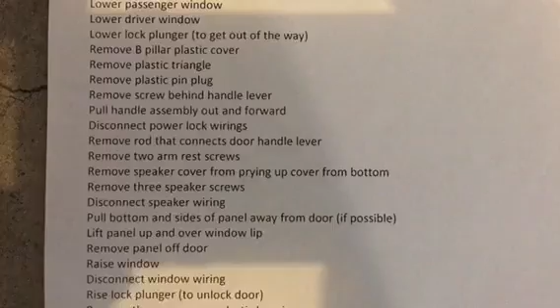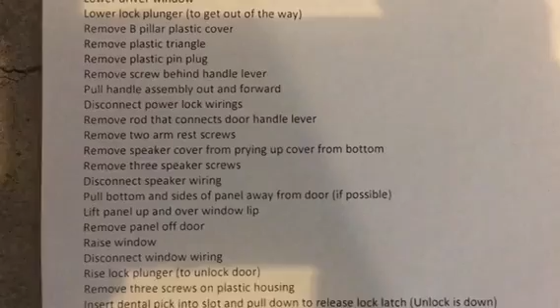From there you want to disconnect the power lock wiring, and then remove the rod that connects the door handle lever to that latch assembly we're talking about. Then you want to remove two screws for the armrest. Remove the speaker cover by prying that little plastic cover from the bottom.

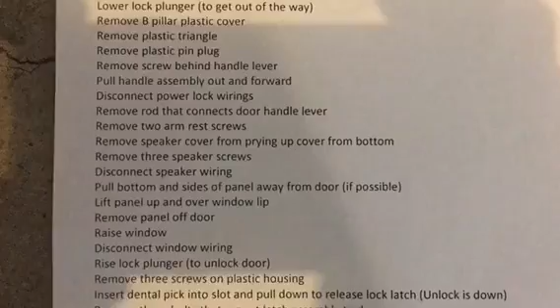I believe there's 3 or 4 screws that mount the speaker. It's dual purpose screws, I believe, that mount the speaker to the panel and then the panel to the door. Then you want to disconnect the speaker wiring. At that point, I believe the panel is ready to be removed.

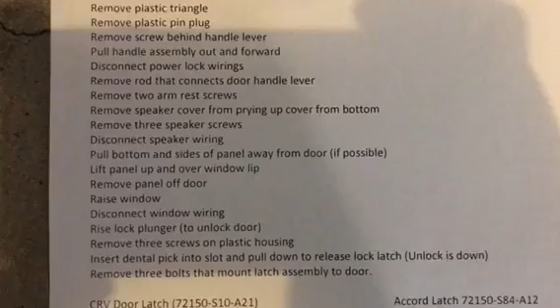Now the door is closed, so it's going to be difficult to do this. I don't even know if it's possible, but to actually now remove the panel. That is going to be, one, you want to, if you can, pop out the panel on the bottom. There are those very common plastic posts that snap in a door panel.

Once you have this free, then you remove the door panel by pulling it up and over the lip of the window. From there, now the door panel should be off, or as free as you can get it. Now from there, raise the window.

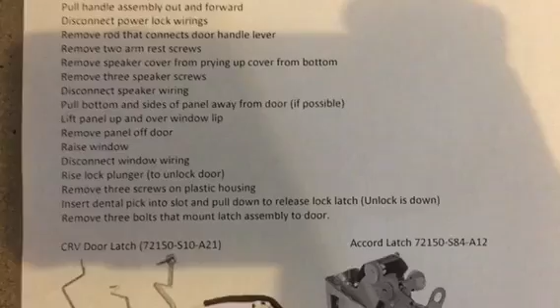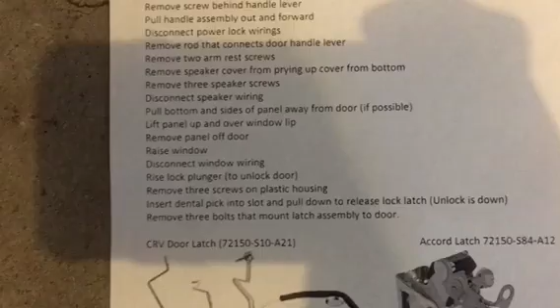Now we want the window out of the way. There are a couple of YouTube channels that say you can remove the guide, the slot that part of the window slides up and down in. Unfortunately, on the CRV, you cannot do that because the bolt is not on the inside of the door. It is on the side of the door, which you can't have access to.

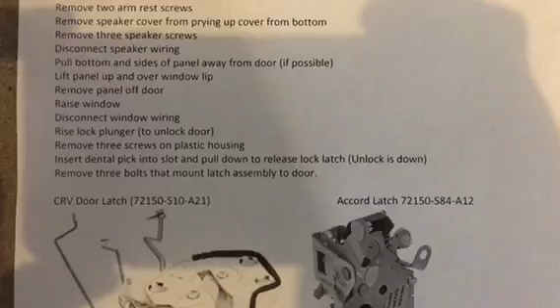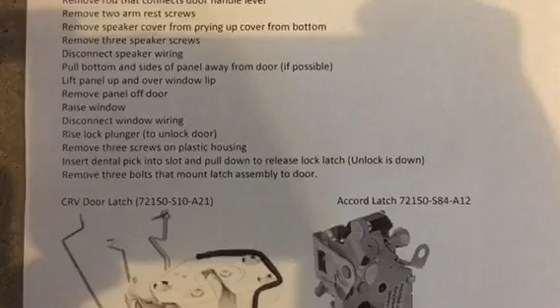Finally, now you want to raise the plunger. Basically, you want to unlock that assembly. From there, now you want to insert like a dental pick or something and pull this hidden pin down. That will, regardless of position, whether you're locked or the position of the handle, inside or outside, release that pin. This is going to be a little bit difficult to find because the YouTubes I've seen are for an Accord or a Honda Civic, not necessarily for the CRV.

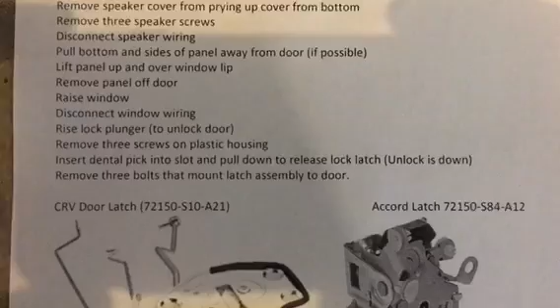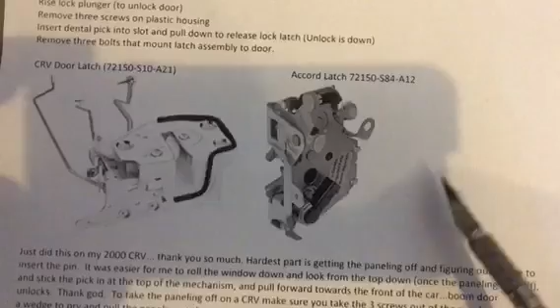Once you have that, there are going to be 3 bolts mounting the plastic cover on this. The YouTube videos I've seen are for something similar, but the CRV has something like this. These operate similarly, but the release of this latch pin is going to be different.

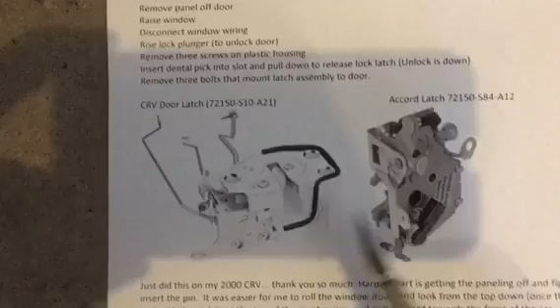These are the tools I have at my disposal - some tweezers, and I do have a dental pick around here, but these are the ones I'm going to be using. Let me show you what we're going to be doing on the inside in a moment.

So getting back, here's the inside of the door. Things we need to do - that's the plastic triangle, this should pop straight out. There's a screw back up under here. Once this is released and unscrewed, you can pop this forward, out and forward.

There will be an electrical connection for this power lock, as well as a rod assembly that you'll be able to take off. There's going to be a couple of screws right here. Sorry you can't see this too much, it's a cold winter day in Minnesota and I am in a garage with not much light.

Here's the speaker cover, can't even see it right now. Pop that off, there's 3 screws there. Then raise the lock, and if you can, pop the bottom part and the edges of the door panel off, and then you'll hopefully be able to slide the door panel up over the window ridge, and hopefully that'll do the trick.

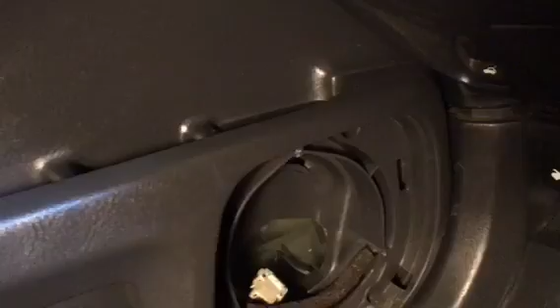Both screws are removed for the armrest, and then there were 3 screws down here by the speaker. The speaker came out. Now I've got to wrestle with this and try to get the door panel off. I'll see how that goes and let you know the best approach.

Well, I haven't gotten the door panel off. I did remove the B-pillar plastic. I did that by opening the back door and sliding the flange over the door lip, and then basically beefing it and torquing it over the front door lip where the front door panel is. It is Minnesota, about 0 degrees Fahrenheit out there. It is cold - I did shatter the plastic.

I'll have to replace that. Additionally, I did find another screw. It is right there - this is the front of the armrest. You're going to need a little stubby Phillips screwdriver to get that off.

Alright, so I do apologize - the 3 screws down by the speaker were just to hold the speaker on. They were not dual purpose, meaning hold the speaker on to the panel which also holds the panel onto the door. There are 3 other screws that held the panel onto the door.

So once those were removed, you can pop the lower portion of the door panel off, and a little bit of success. You can now pull it up and out of the way. Whoopsie daisy, can't see it - oh, you saw it there for a moment. It's going to be able to pull up and out of the way.

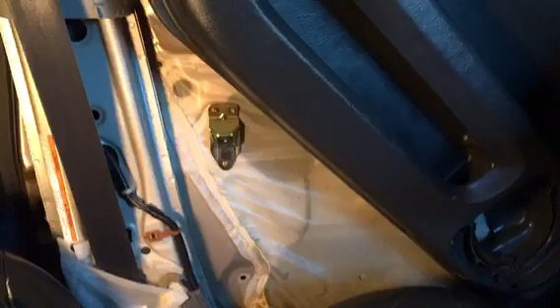So next is to get into the door panel and release the lock from the latch mechanism. The panel has been raised out of the way - it's still in the way a little bit, but I should be able to get into the door panel. The last remaining pin I cannot get out. It is hidden behind the dashboard, and I'll show you on the passenger side where it is.

Now, it's right there, below that triangle piece of plastic. That is hidden by the dashboard, so you can't get to it. I'll just have to have this panel swung out of the way as I work on the latch assembly. The panel is still hinging on that one post.

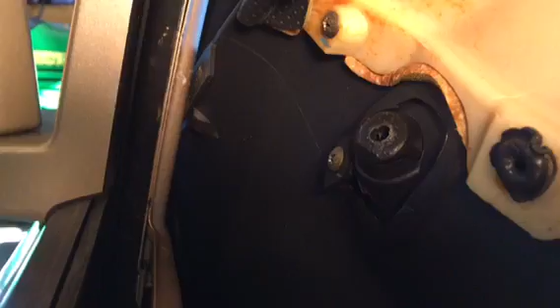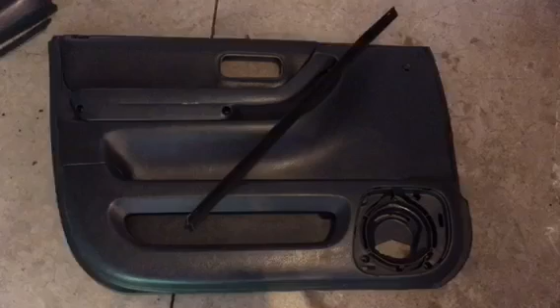All right, that was very simple. Just a couple of seconds with a plastic hacksaw, cut right through that plastic post on that pin. I've got now full access to the inside of that panel to find out where that release is and open the door. So I'm back inside the vehicle.

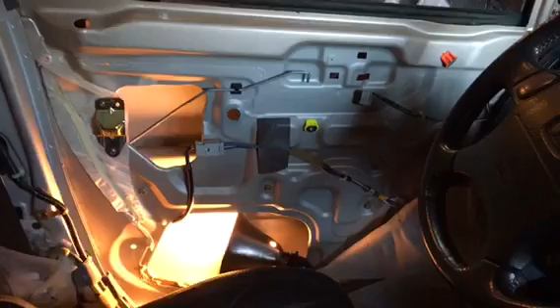I've got a light shining up into the cavity of the door panel. Tools-wise, I was able to find a dental pick, a small dental plastic mirror, as well as a larger cosmetic mirror. So I'm going to try to show you what is going on here.

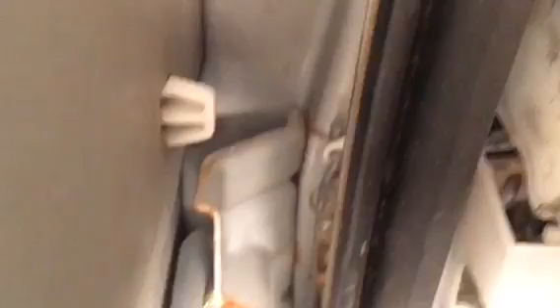I'm going to have to flip this. I don't even know if you can see this - I cannot see the screen. This is where it really does become awkward.

There is a release somewhere on the back side of this, and there's also supposed to be a spring. I see the spring is broken. Maybe all I need to do is put some pressure on where that other end of that spring is supposed to be, and then open the door from the handle. Or I need to somehow find that magically hidden release pin.

We'll keep working on it. Well, I got the door open, but I did not find that magical release.

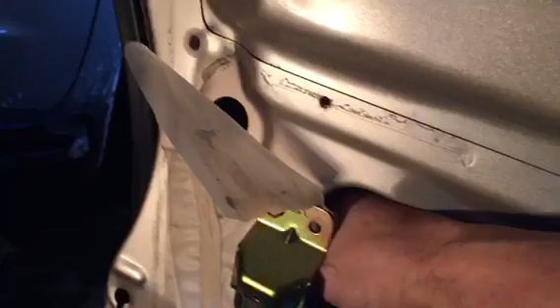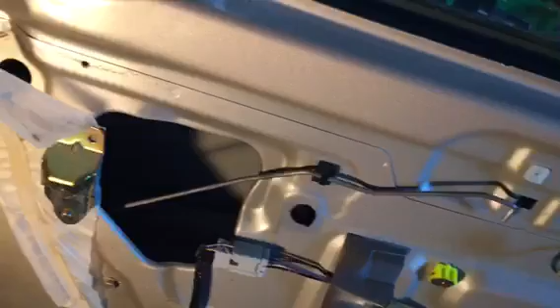What I ended up doing is pulling up as hard as I could on the door latch, the mechanical door latch, as hard as I could. Then, while doing that, I pulled on the release. When I pulled on the door latch release from the inside, magically that opened the door. Hopefully that will work for you.

So now I'm in the process of removing the screws that hold the latch in, as well as removing this bolt right here, which holds the rear window guide in. Taking that off will allow you to remove that assembly. So this is the latch assembly.

I believe the failure point is a spring that goes between these 2 points. At the bottom of the door, I found a spring that's got a broken end. It rides inside a sheath. So I went to the local hardware store and I picked up another replacement spring.

I'm going to shorten it a little bit and then pull a winding over across the top, and that will be able to replicate the actuation of that spring. Hopefully that will fix this.

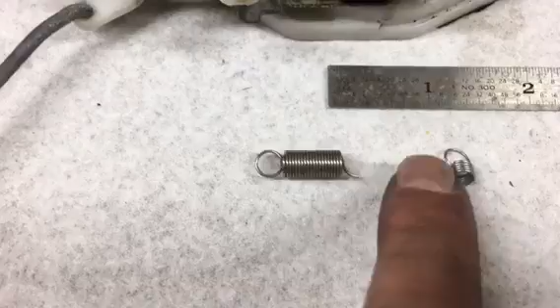So this is my repair. Here's the broken spring. Here's the section that I cut off the replacement spring, and that is located between this post and this post on this item. My expectation is that this will be the repair for it.

Hopefully you'll be able to put this replacement spring on without unassembling the entire door latch assembly from the door. You should be able to do this just right through the holes that are in the door. This was an absolute pain to take out, but if this is the fix, wonderful - that's fantastic. If it's not, then I'm going to have more problems.